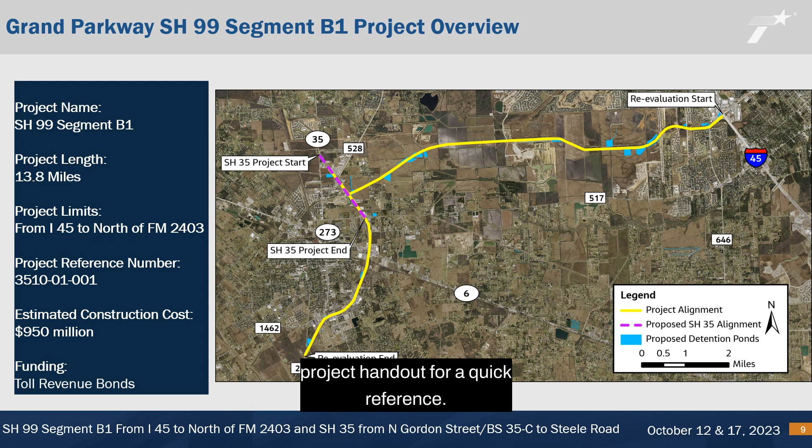A purpose and need was presented in the Grand Parkway State Highway 99 2016 FEIS and approved in the 2016 ROD. The need and purpose has not changed and is carried forward in the re-evaluation. The needs include system linkage, which provides efficient connections or linkages between major suburban communities and major roadways that radiate outward from Houston. Expanded capacity: transportation demand exceeds the current and future capacity of the existing transportation system.

Safety: reduce congestion during emergency events by providing an alternative route to established evacuation routes. And economic development: the project would accommodate demographic and economic growth by improving the movement of persons and goods in the area.

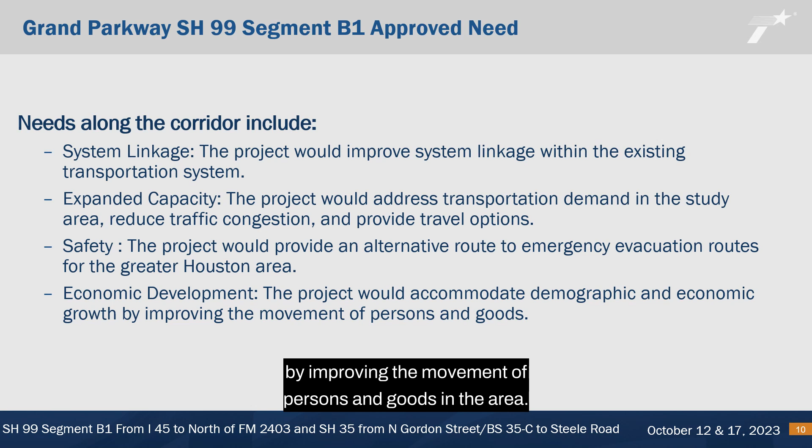The purpose of the approved State Highway 99 Segment B is to efficiently link suburban communities and major roadways, enhance mobility, respond to economic growth, and provide additional access to established hurricane evacuation routes.

Now we would like to discuss the proposed design changes that have occurred since the FEIS ROD approval in 2016. There is a proposed alignment shift between Calder Road and Hobbs Road to avoid 26 new homes in the Bay Colony West subdivision that were constructed within the approved FEIS ROD preferred alignment. The alignment would be shifted to the north along an alignment reviewed in the draft EIS.

This shift to the north to the draft EIS alignment would require a re-evaluation of approximately 35 acres of right-of-way that was not in the FEIS ROD approved alignment and would impact one property that was not previously impacted. There would be no additional displacements as a result of the proposed alignment shift.

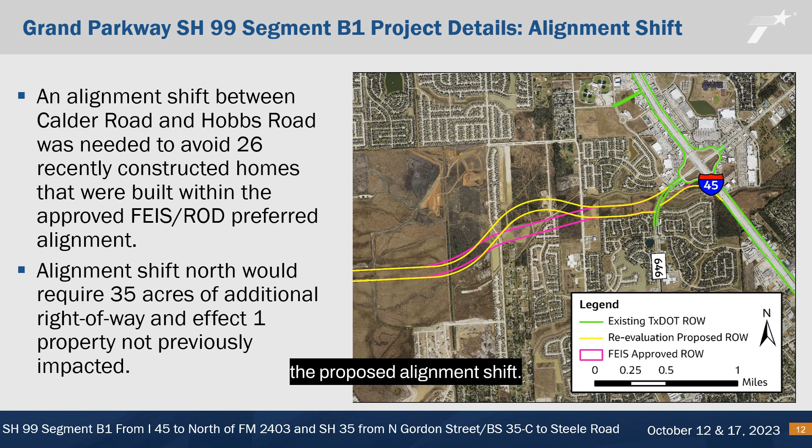As design was further developed, one of the approved direct connectors at I-45 and FM 646 was shown to extend beyond the approved right-of-way. Illustrated on the slide in peach hatching, this change requires approximately 4 acres of additional right-of-way from one property owner that was not evaluated in the 2016 FEIS and ROD. The proposed design change would not result in any additional displacement.

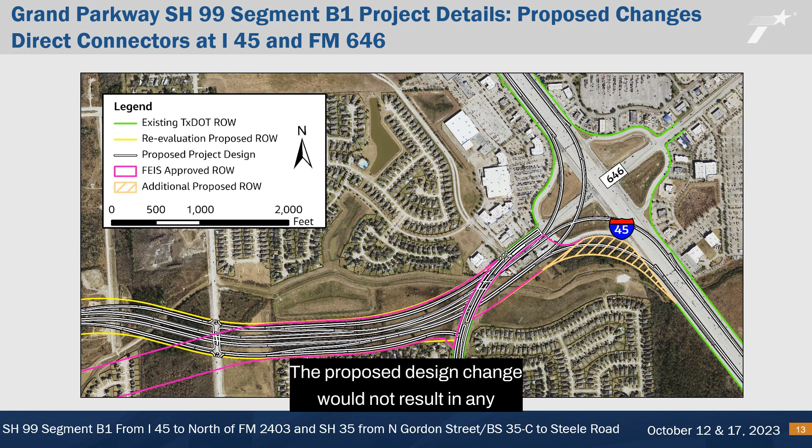The next 3 design changes we will discuss are proposed to accommodate future planned development in the League City area. These changes include: one new overpass is proposed to cross over a new unnamed road located between Bay Area Boulevard and Landing Street. The proposed design change would not result in any additional displacements or additional right-of-way.

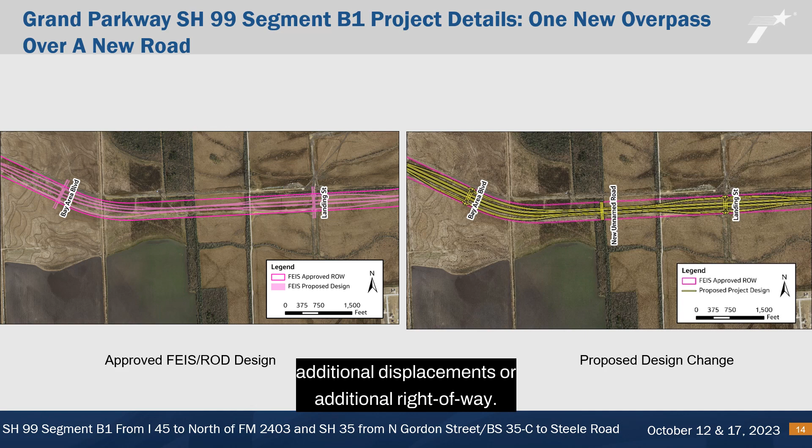The existing diamond interchange approved in the 2016 ROD would have crossed Maple Leaf and McFarland. A diamond interchange is a common road junction used where a controlled access highway crosses a minor road. The proposed design would elongate the diamond interchange from west of West Road to east of Maple Leaf Drive. This redesigned elongated interchange would span West Road, an unnamed roadway, McFarland Street, and Maple Leaf Drive.

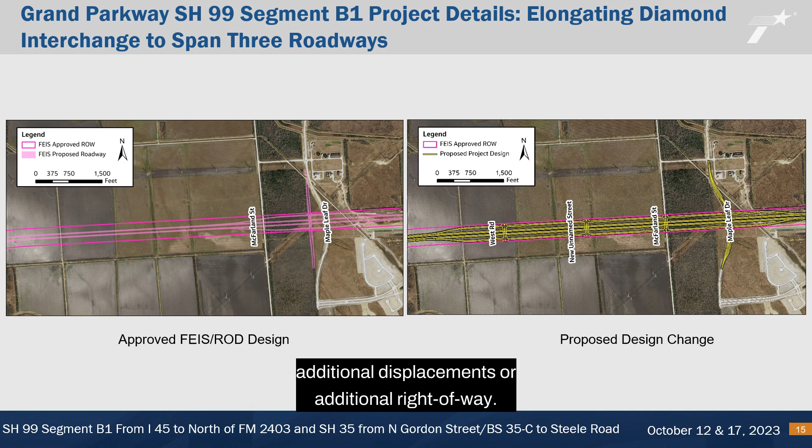Discontinuous frontage roads would connect all roads spanned by the elongated interchange. The proposed design change would not result in any additional displacements or additional right-of-way. A new diamond interchange is proposed over an unnamed roadway that would be located between Clifford Street and West Road, which was not part of the approved 2016 FEIS ROD design. The proposed design change would not result in any additional displacements or additional right-of-way.

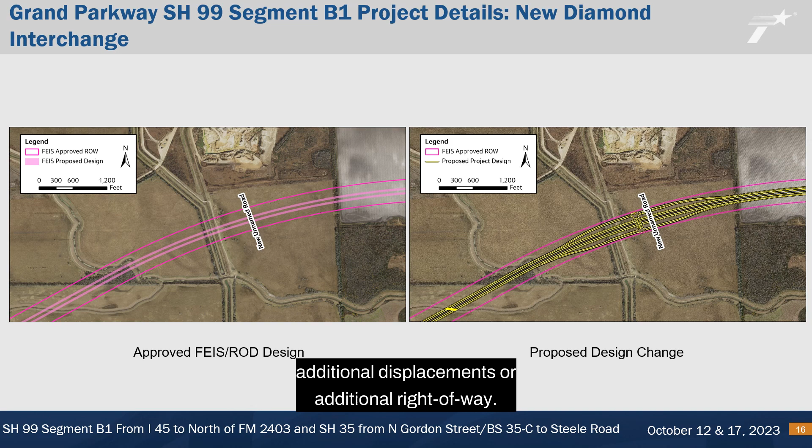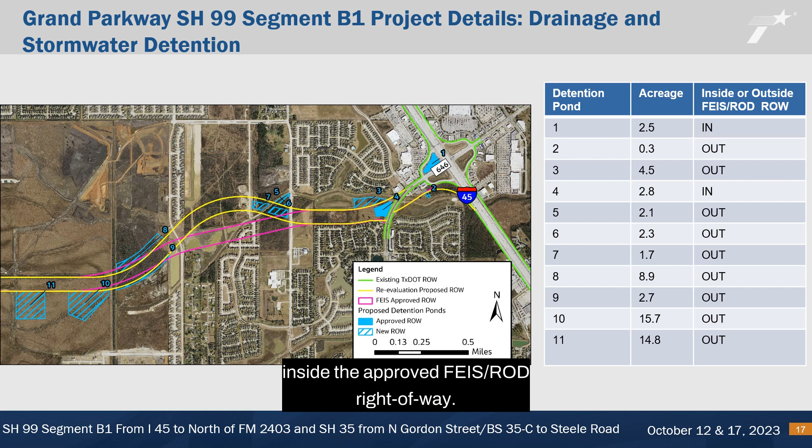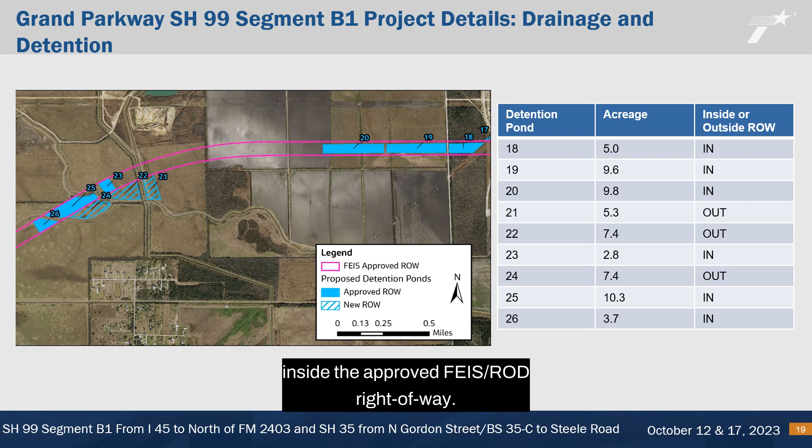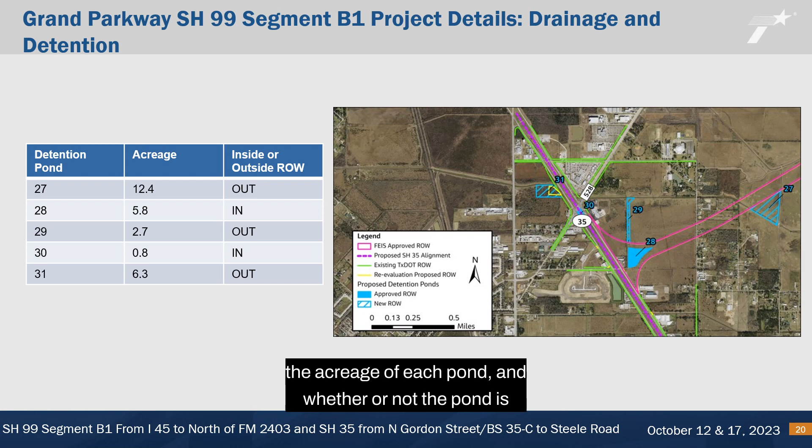This slide shows the location of the proposed stormwater detention ponds from 18 to 26, the acreage of each pond, and whether or not the pond is inside the approved FEIS ROD right-of-way. This slide shows the location of the proposed stormwater detention ponds from 27 to 31, the acreage of each pond, and whether or not the pond is inside the approved FEIS ROD right-of-way.

This slide shows the location of the proposed stormwater detention pond 32, the acreage of the pond, and whether or not the pond is inside the approved FEIS ROD right-of-way.

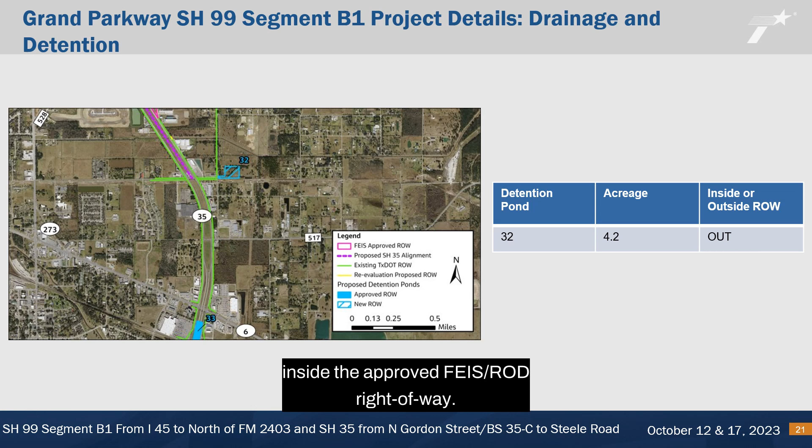This slide shows the location of the proposed stormwater detention ponds from 33 to 38, the acreage of each pond, and whether or not the pond is inside the approved FEIS ROD right-of-way.

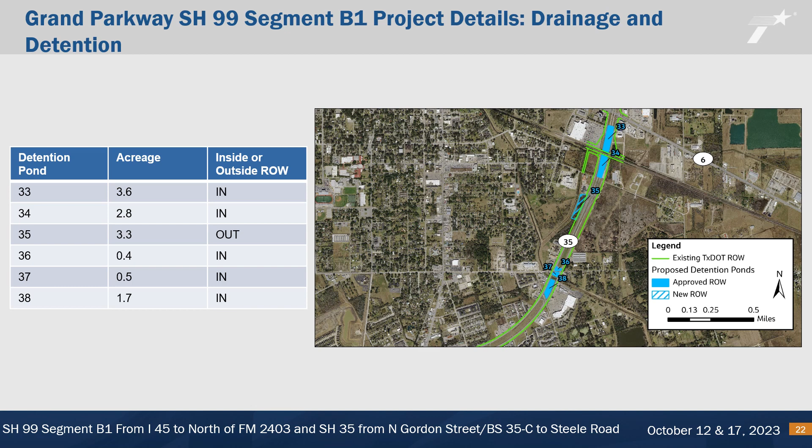This slide shows the location of the proposed stormwater detention ponds from 39 to 43, the acreage of each pond, and whether or not the pond is inside the approved FEIS ROD right-of-way.

In summary, the total new right-of-way required for the proposed stormwater detention ponds would be approximately 130 acres. The schematic files, which show these locations in more detail, are available for viewing at the in-person open house and online. These files are large and may take time to download.

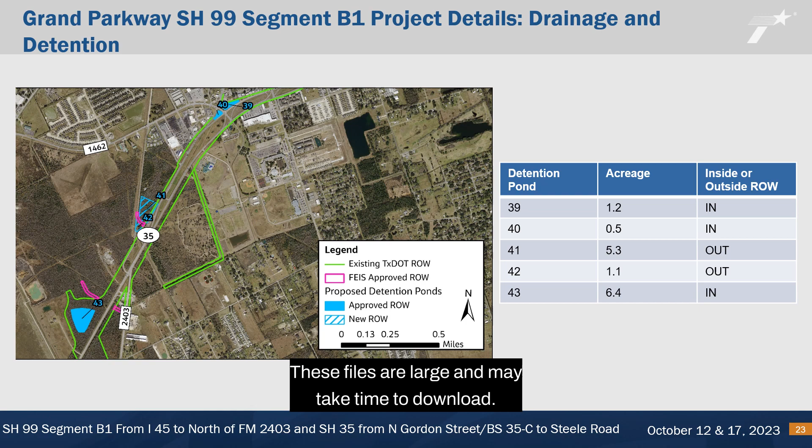Currently, travelers can use the State Highway 35 overpass to avoid going through the signal at State Highway 6. This movement must be maintained in the proposed design. However, toll traffic and free-moving traffic could not be mixed. Therefore, to improve safety and maintain traffic flow, design changes are proposed at State Highway 6.

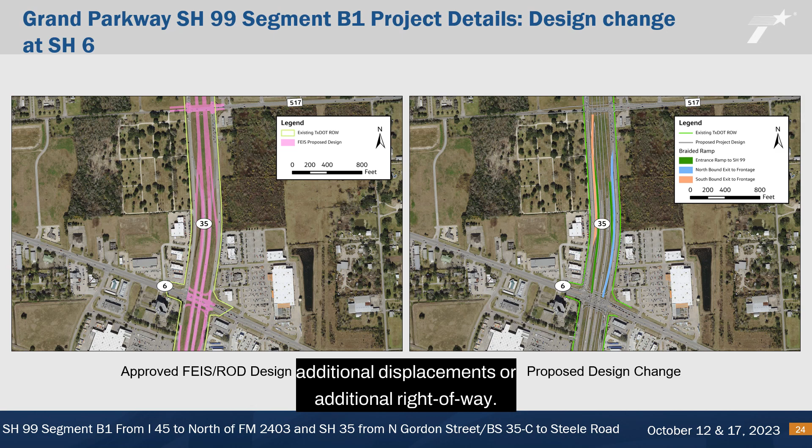Instead of the approved southbound exit ramp to State Highway 6 and northbound entrance ramp from State Highway 6, braided ramps are proposed. Braided ramps would allow traffic to enter and exit the roadway by one ramp braiding over the other, separating traffic that is entering from traffic that is exiting, which eliminates the weaving of traffic and is safer. The proposed design change would not result in any additional displacements or additional right-of-way.

The proposed design change would not result in any additional displacements or additional right-of-way.

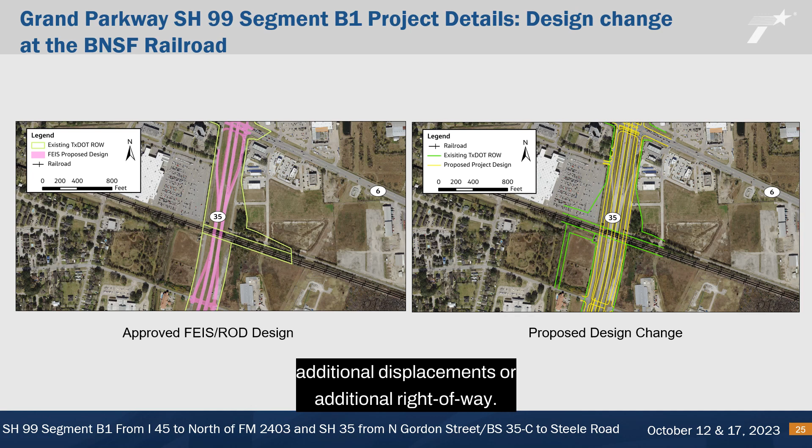In summary, the proposed design changes would require a total of 169 acres of additional right-of-way. The additional right-of-way required by the design changes would not cause any additional displacements or relocations than what was determined in the 2016 FEIS and ROD.

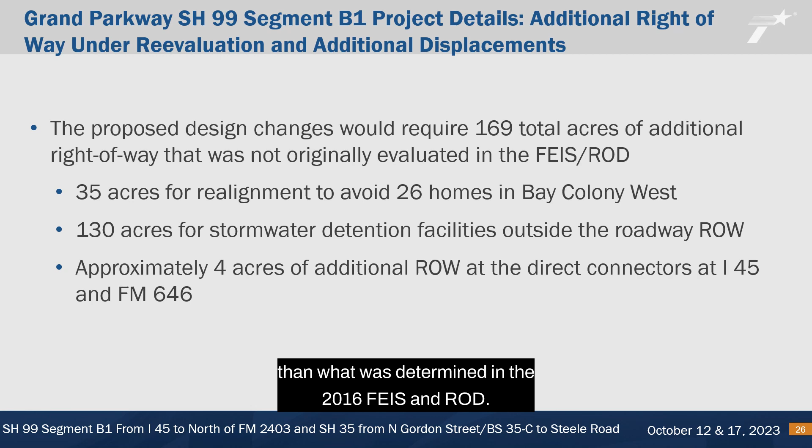While the design changes under consideration in this presentation would not result in displacement of residences or businesses, this exhibit illustrates a change in adjacent land use since the ROD was approved in 2016.

Based on aerial photography, the Take 5 Oil Change at 1831 FM 646 Road West, Dickinson, Texas 77539, was built between December 2019 and October 2020 within the selected alignment of Grand Parkway. Shifting the alignment to avoid this business is not reasonable or feasible. Therefore, it is anticipated to be displaced.

The other buildings adjacent to the Take 5 Oil Change are displacements that are discussed in the FEIS and were disclosed to the public during the public meetings in August 2012.

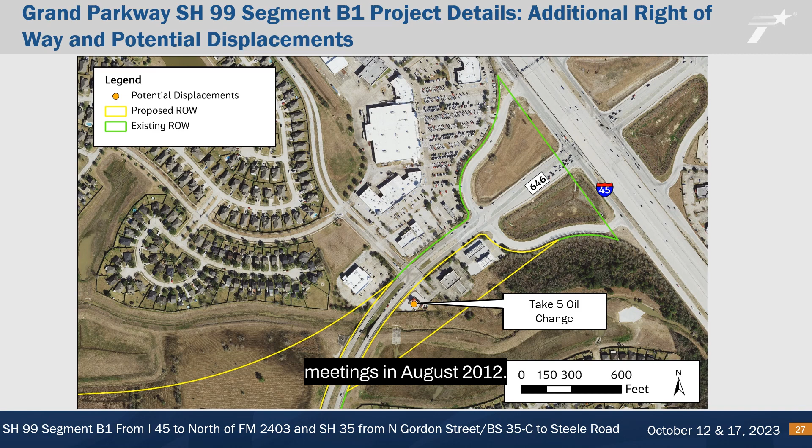TxDOT offers relocation counseling and financial assistance to residents and businesses that are displaced by the acquisition of highway right-of-way in accordance with the Uniform Relocation Assistance and Real Property Acquisition Policies Act of 1970. TxDOT would provide assistance to potentially displaced residences and businesses.

Information regarding the schedule of acquisition may be obtained by calling Mark Nazer at 713-802-5606.

The project team is identifying and re-evaluating potential environmental impacts that could occur as a result of the proposed design changes. Those areas outside of the proposed design changes are addressed in the 2016 FEIS. Areas that are under review include biological resources, community impacts, environmental justice, water resources, hazardous materials, archaeological resources, historic resources, and traffic noise. The project would be designed to avoid or minimize impacts to the greatest amount practicable. Once completed, technical reports documenting the analyses and conclusion of these studies would be available for review upon request.

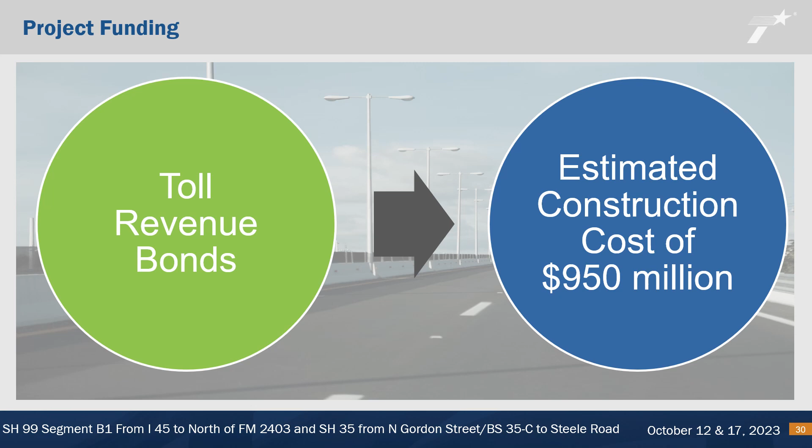Now we would like to discuss the proposed State Highway 35 project, which would extend for approximately 1.33 miles along State Highway 35 from North Gordon Street Business 35C to Steele Road. As discussed earlier, this project would be constructed in combination with the State Highway 99 project to reduce contractor conflicts, decrease impacts to the traveling public, avoid future design changes, and expedite construction.

The majority of the project would take place within the existing 420 foot of right-of-way. The project would require the acquisition of 1.69 acres of right-of-way for the proposed detention pond and a small corner clip on the southwest corner of the intersection at State Highway 35 and Wheeler Road. This acquisition would not result in any displacements. This information can also be found in the project handout for a quick reference.

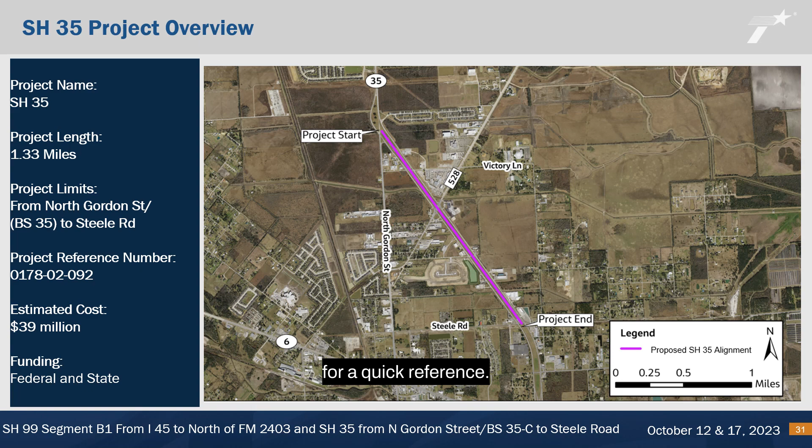On this slide is an illustration of the existing typical section of State Highway 35. Within the project limits, State Highway 35 is currently a 4-lane divided roadway with 2 lanes in each direction and a 190-foot wide grassy median. Either direction of travel has 2 12-foot wide lanes with a 4-foot wide inside shoulder, 8-foot wide outside shoulder, and ditches on either side.

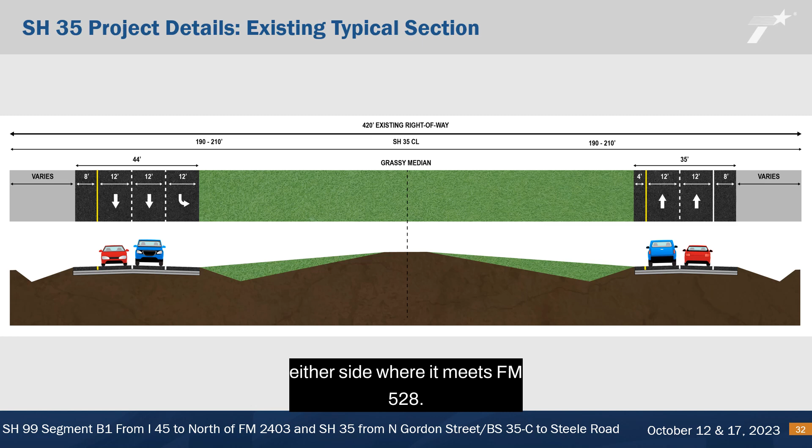A full schematic of State Highway 35 design can be found at the in-person public meeting and online. State Highway 35 gains one left turn lane on either side where it meets Wheeler Road. State Highway 35 gains one left lane and one right turn lane on either side where it meets FM 528.

This slide illustrates the proposed typical section, or cross-section, of what the road would look like with the proposed project. The proposed project would construct elevated main lanes within the grassy median of the existing facility and reconstruct the existing lanes to function as frontage roads. The majority of the project would have four 12-foot wide elevated main lanes, 2 in each direction, with a 10-foot wide outside shoulder. The inside shoulders would vary between 10 feet and 6 feet wide.

The project also proposes intersection improvements on the converted State Highway 35 frontage roads at FM 528 and Wheeler. The project would add U-turn lanes under the proposed State Highway 35 overpass and reconfigure the intersections for increased efficiency. The 10-foot wide shared use path along FM 528 would extend across State Highway 35 under the elevated main lanes and continue along FM 528. For more information on the proposed design, please visit the project webpage and download the project schematic or view it at the in-person open house.

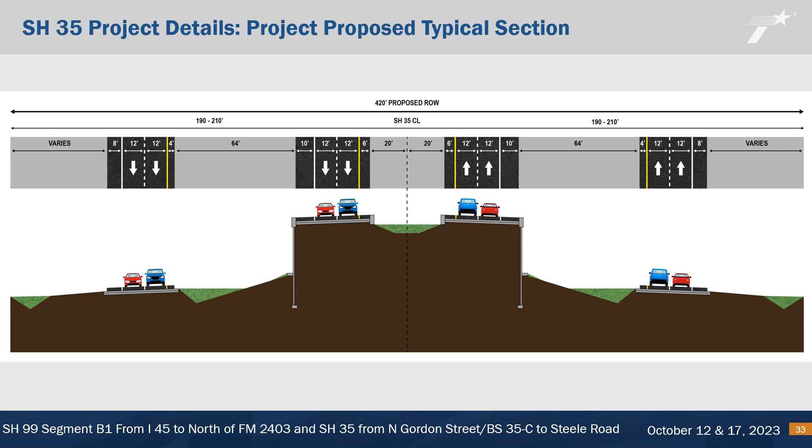The proposed project would be funded by federal and state funds, and the estimated total cost is $39 million.

TxDOT encourages you to review the materials regarding the proposed project improvements and provide feedback. You may submit comments in the following ways. Download the comment card from the project webpage by going to https://www.txdot.gov/projects/hearings-meetings.html and email to hou-pio-webmail@txdot.gov. Fill out the comment card at the open house and drop it in the comment box, or mail the comment card to TxDOT Houston District, attention, Advanced Project Development Director, P.O. Box 1386, Houston, Texas 77251-1386. Comments must be received or postmarked by November 1st, 2023 to be included in the public meeting documentation.